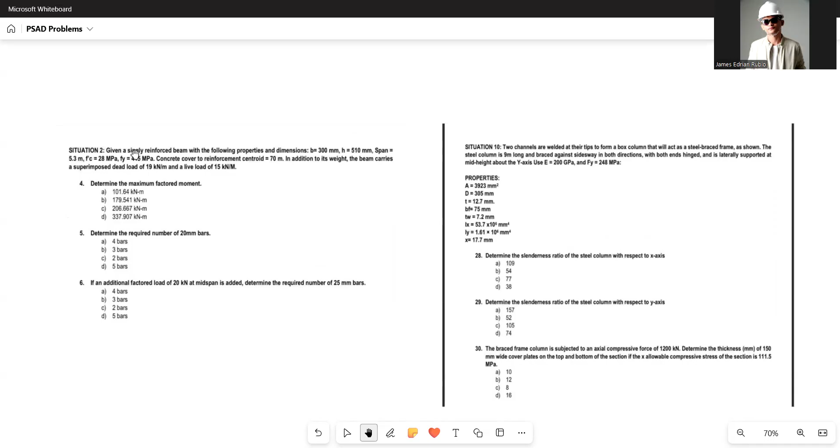Okay, so let's answer these two problems. One involving an RCD problem, the other for steel design.

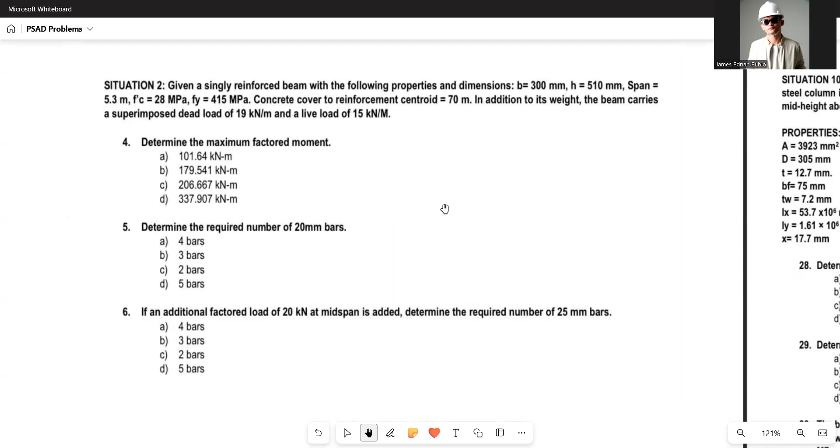So the given problem is stated as follows: given a singly reinforced beam with the following properties and dimensions. Let's draw that.

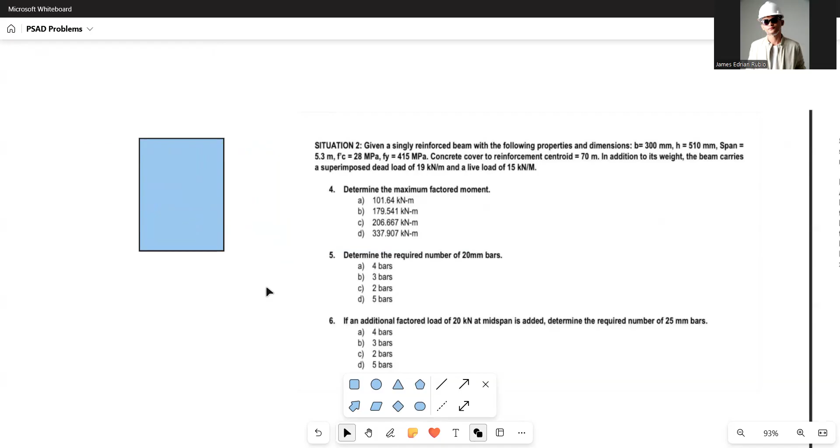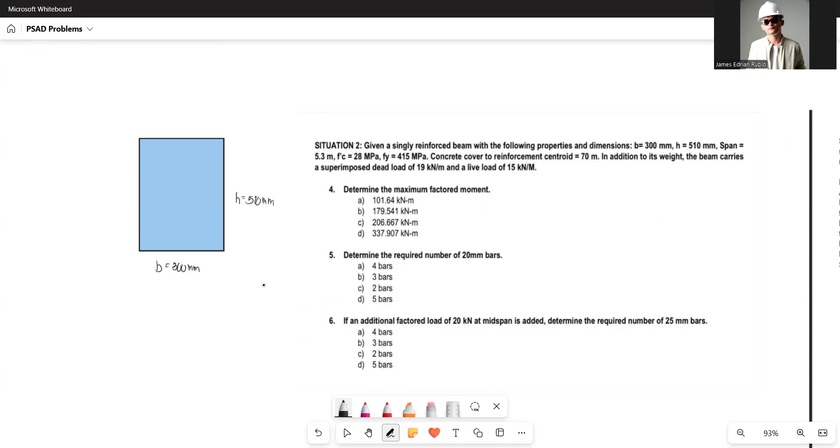So given a beam, a reinforced beam, with the following dimensions. Our base, you have a base of 300 mm, a height, total height of 510 mm, and a span, so basically this is a span.

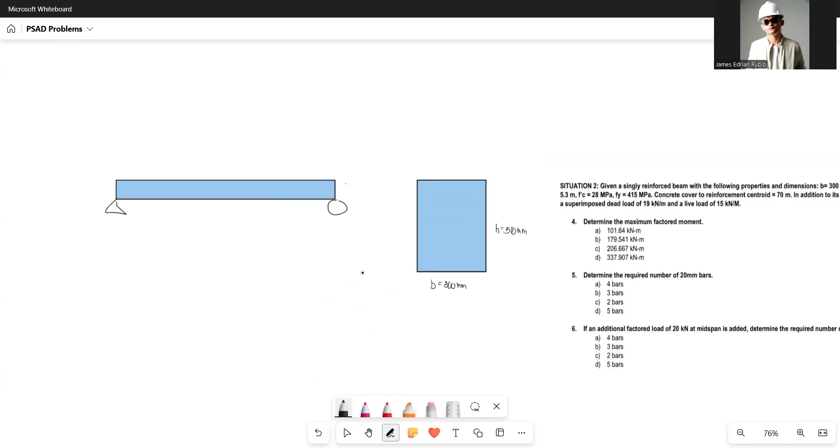So here is... this is just a simple span. It's also stated as a simply supported beam.

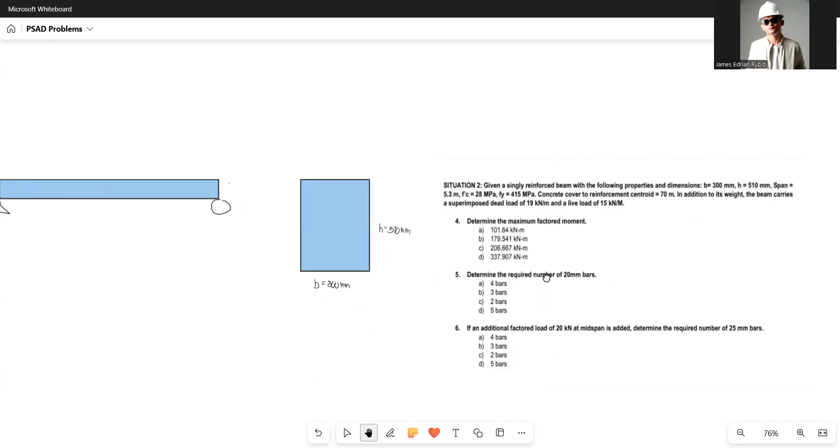So, a singly reinforced beam with the following properties and dimensions: B300, H510, span of 5.3 meters. f prime of c, or the specified compressive strength of concrete, that is 28 megapascals. So Fy is 415 megapascals.

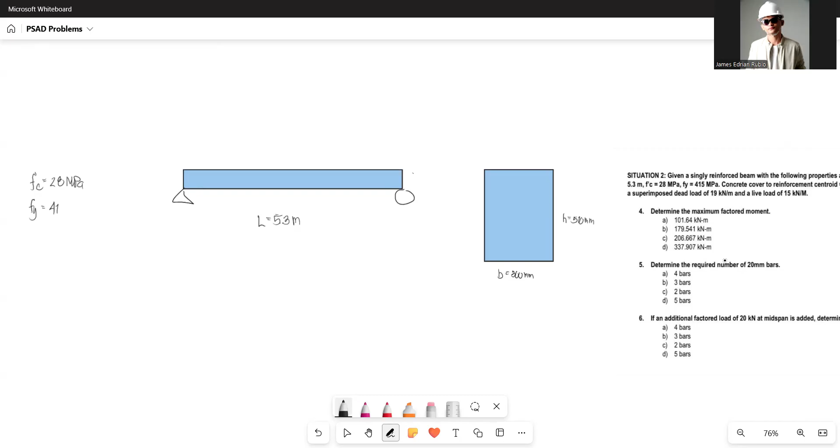Okay, so concrete cover rather, to reinforcement centroid. So this is the tension steel. SRB lang naman yan, so that will be 70.

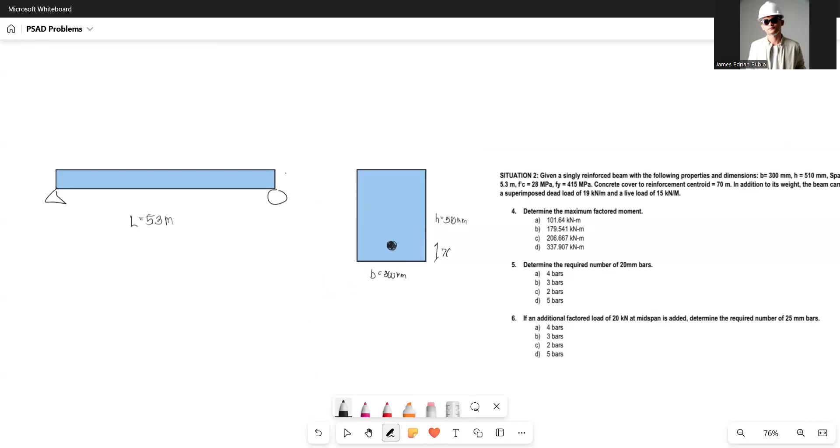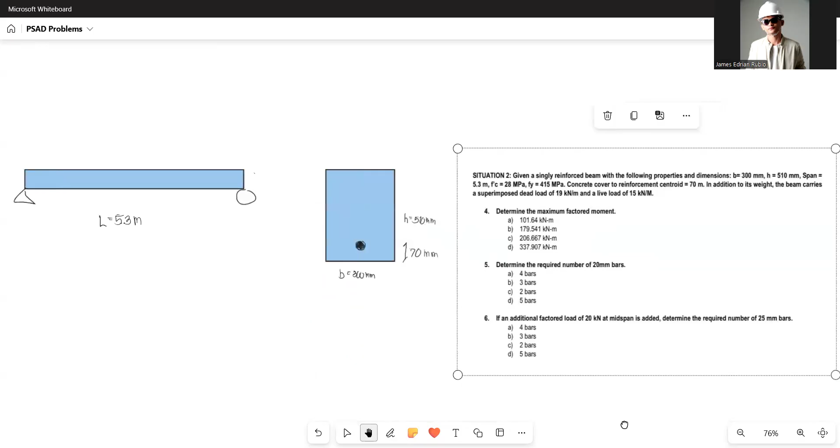So in addition to its weight, the beam carries a superimposed dead load of 19. Okay, so suppose that's our beam. Actually, that's fine, that's the beam as is, then this uniformly distributed load.

For the self-weight, what we'll do is use the unit weight of concrete times base and height, base by height of our beam, or its gross area.

So, for unit weight of concrete, what should we use? Let's use, I'll use 24 kilonewtons per cubic meter. Though 23.5 is also acceptable, 23.544, I think that's what's in the code. Basically somewhere around that: 24, 23.5, 25. Did anyone use 25?

So, here's the base and height. Let's convert to meters: 0.3 by, the height is 0.51. Okay, so we got that set up.

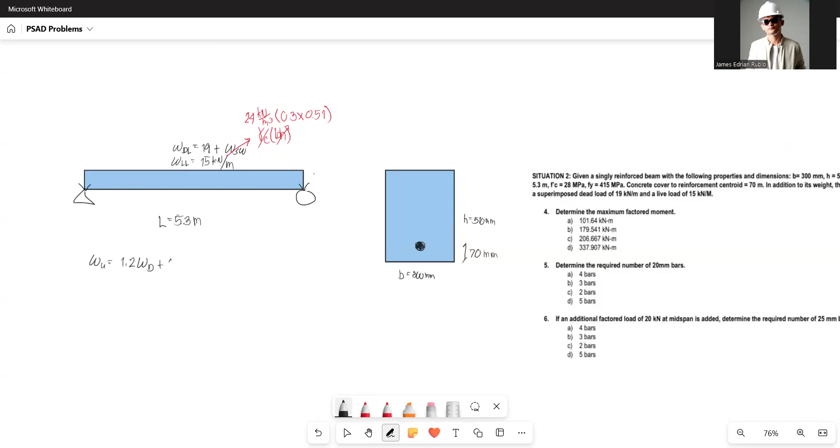Okay, let's set it up. I won't show the full computation, but for the self-weight: 24 times 0.3 times 0.51. I already have the answer: that's 3.672.

So that's 3.672 kilonewtons per meter. Then let's add the 19 times 1.2 plus 1.6 times the 15. So that will be 51.2064 kilonewton per meter. That's our ultimate load.

So given a simple span, we can get the maximum factored moment. That's WL squared over 8, that's the maximum moment. W we already have, length in meters is 5.3. Square that over 8, so that will be 179.798 kilonewton meter. So that's the answer for number 4, 179.

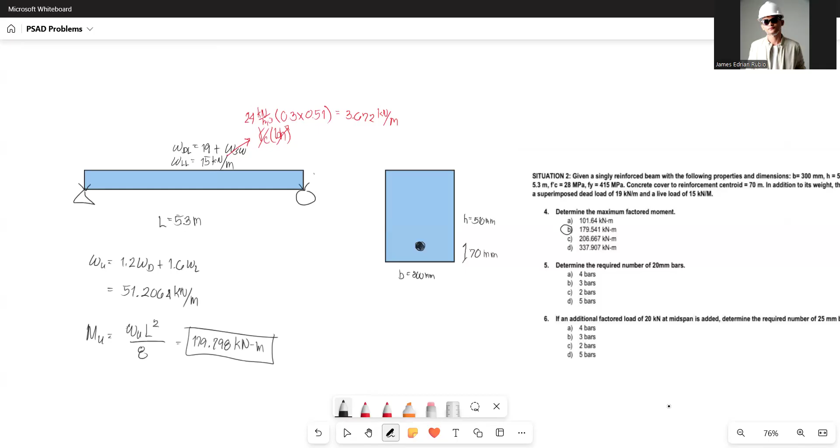So, next: determine the number of 20mm bars. Of course we'll use the MU, which is given in the choices to use. So 179.541 kilonewton meter. That's for number 4.

Number 5, determine the required 20mm bars. Okay, so we already have the MU. That equals phi MN. We'll get phi later. So MN is the nominal moment, which we can derive from here.

We'll have a compression block there, the depth of the compression block. Can we use a straight line? So here it is, this is our compression block, depth of compression block, let's call it A, then this is B. For the compression in concrete, that's 0.85 times F prime C, then multiply by the area, A times B.

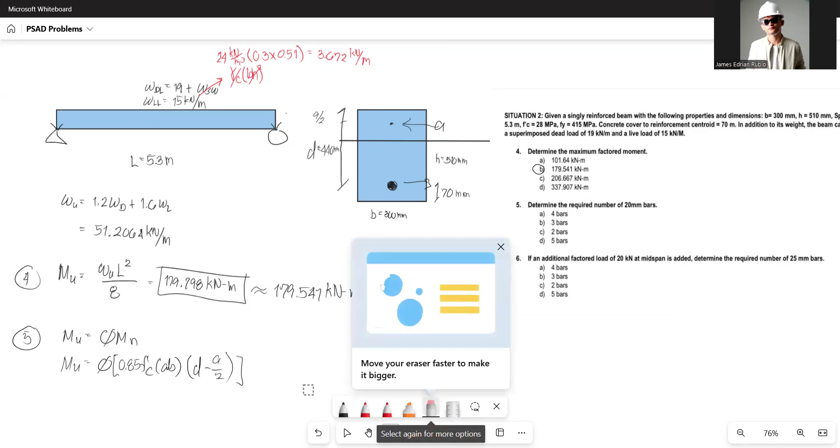Then we get this, okay that's fine. That will have a value in Newton millimeter. This one is in kilonewton meter. So multiply this, since this one is in Newton millimeter, to make it kilonewton meter. So let me write Newton millimeter, to convert to kilonewton meter: 1 Newton... sorry, 1,000 Newton is 1 kilonewton, 1,000 millimeter is 1 meter. So the Newton and millimeter cancel out.

So basically you have to divide it by 1,000. Or it can be made into 1 times 10 to the negative 6. Or divide by 1,000. Ah, 1 million actually, not 1,000. It's 1 million, so that's it.

What we get there is the value of A. Let's get the value A there. So this value, let's use this as 179.541, F prime of C, given A. This is what we'll get, the value of A. The D we already have, so there.

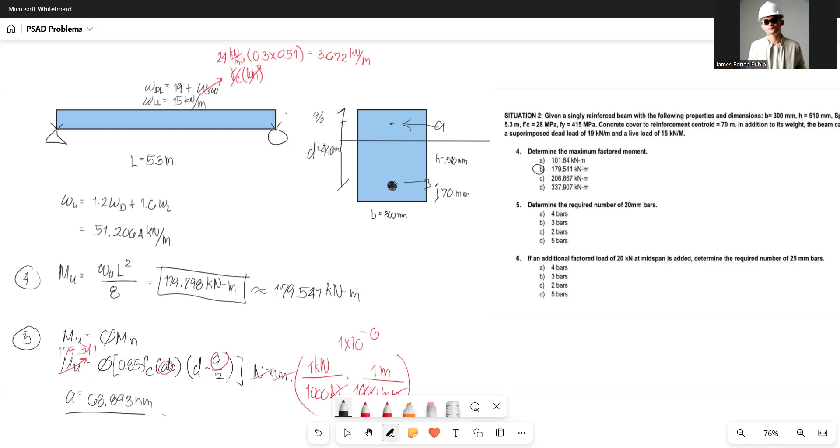To solve for A, the value, that will be 68.893 mm. There we go.

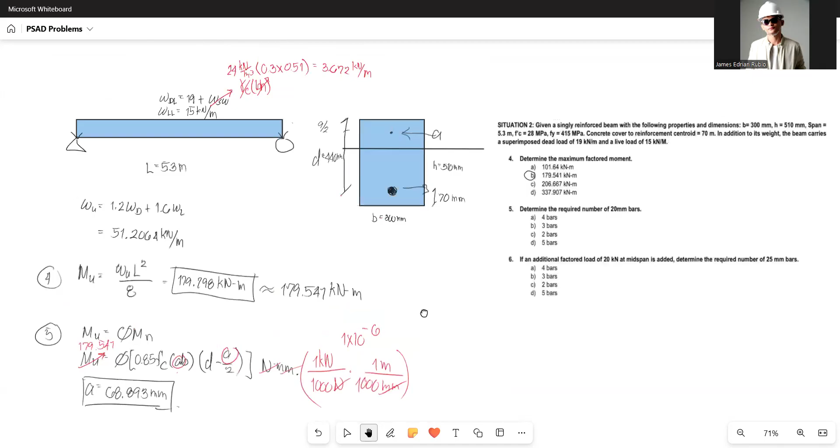Okay, so we've got A. What's next? What we need is the number of bars. So let's equate that. Let's get... okay, let's just derive the formula. We all know that compression equals tension. These are forces: 0.85 F prime of C, times AB, equals AS, FY. So to solve for AS, let's solve for AS: that will be 0.85 F prime of C, AB, over FY. So let's see, just substitute the value of A we got earlier.

That will be 68.893. So our AS is 1185.29 mm squared.

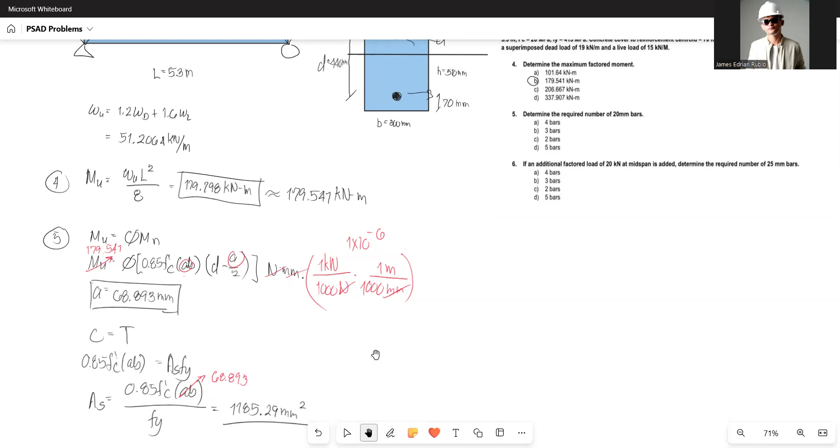Okay, so that's just the area, total steel. What we need is the number of bars. That's 20 mm. Actually, we could put it here, right? Sure, let's equate this. This is the area of the bar: pi over 4, diameter squared, times n. I already know the d, this is 20. So to solve for n, what is it? 3.773 bars. Or let's round up to 4 bars. 4 bars of 20 mm. There, that's your answer. 4 bars it is.

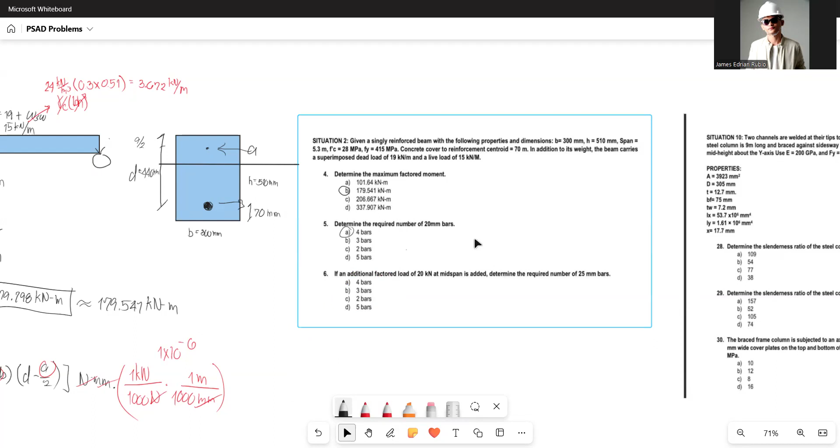Next, if an additional factored load of 20 kilonewton is added at midspan, determine the required number of 25 mm bars. Okay, so this repeats again. Basically you're going to repeat the process, because it says we're adding 20 kilonewton at midspan. So let's put this here too.

So basically this will change. The ultimate moment is omega UL squared over 8 for UDL. Then we add PL over 4. That's PL over 4. What's being asked is the additional factored load, 20 kilonewton at midspan. That's P, a concentrated load. So that becomes the maximum moment at the center. Since they're at the same position of maximum moment, you just add them.

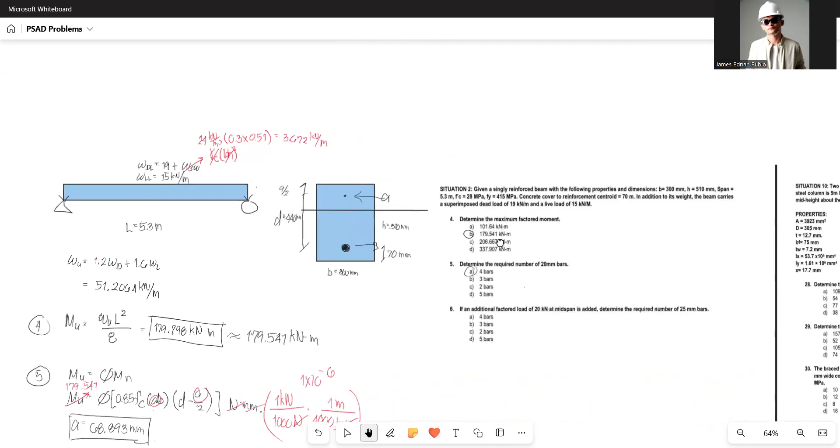So, if an additional factored load of 20 kilonewton at midspan is added, determine the required number of 25 mm bars. Okay, so that's it, these are the same. This is basically the same as before. It will be added with PL over 4. WL squared, we already have that.

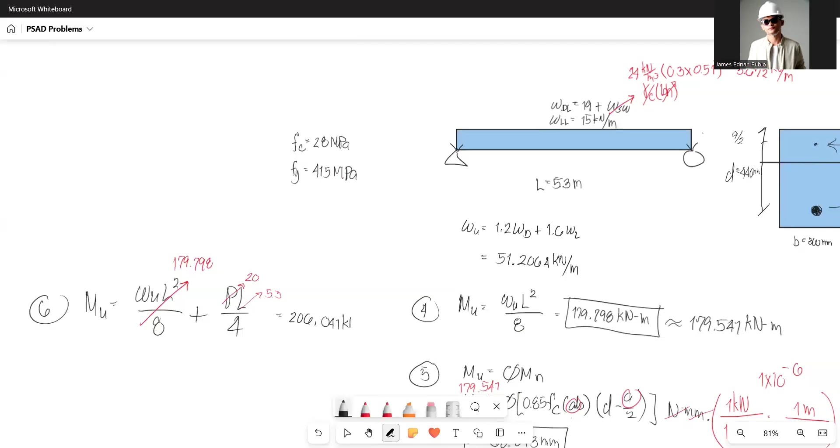179.798. For P, we have this 20 kilonewton, and this one is 5.3. Let's get that value. The new moment is 206.041 kilonewton meter. There. That's the maximum moment for you.

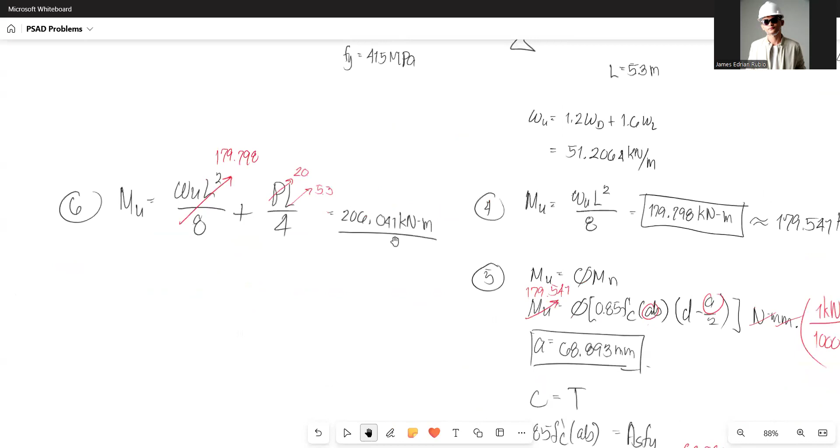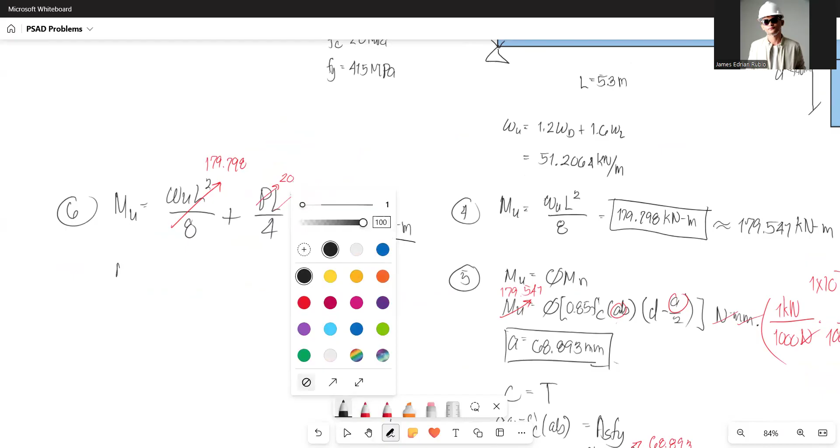Let's get A again. Basically it's just repeated, just added on. Mu. Still, Mu is equal to phi times Mn. So we're still going to use 0.85 F prime of C, AB. Because if we use tension, we don't know AS, and we don't have A either. So there are two unknowns. Let's just use this instead. This is basically already known, just divide by 1 million.

So, we have Mu 206.041. We have this, our unknown. This is the unknown, so solve for that. That will be 80.1768 mm.

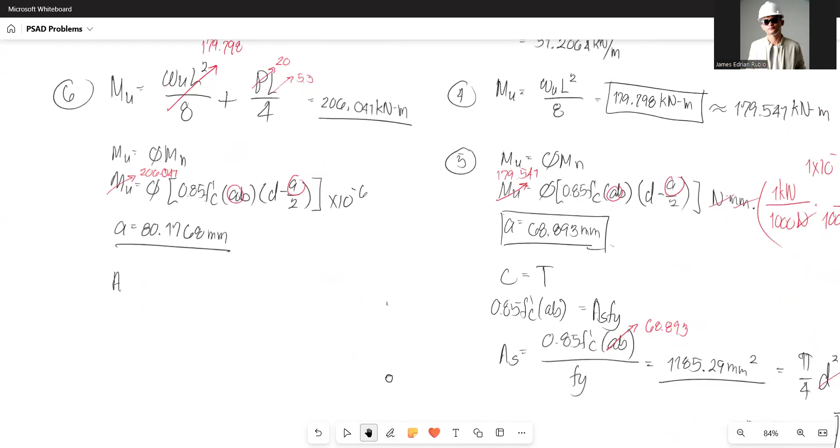Okay, then the area, this is what we're looking for. So the area, what size bars are those? 25 mm bars. The area for 25 mm bars: pi over 4 times diameter squared. This one is 25. And this one, oh, don't we already know this formula? This one is 0.85 F prime of C, AB, over FY. Same as before, which I combined.

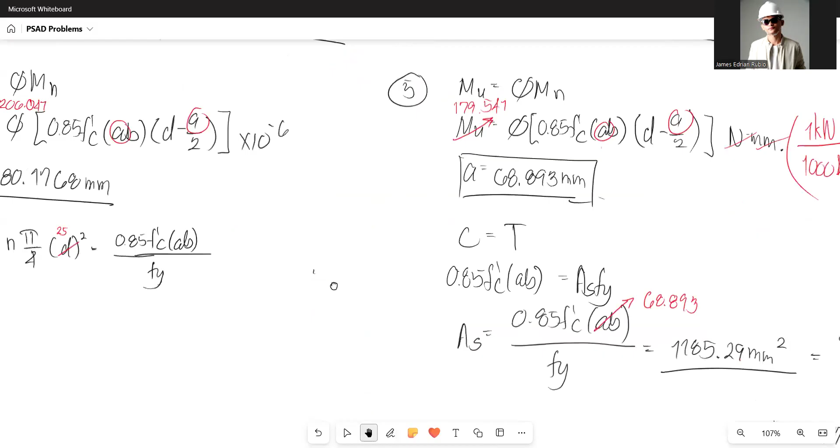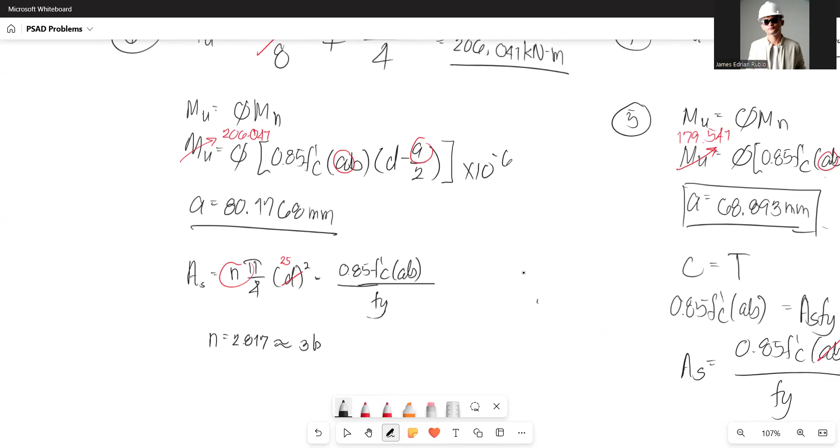So let's solve for N. This is the unknown. We have this, and this. There, so we can solve for N. Number of bars is 2.817. Rounds up to nearly 3 bars. There we go.

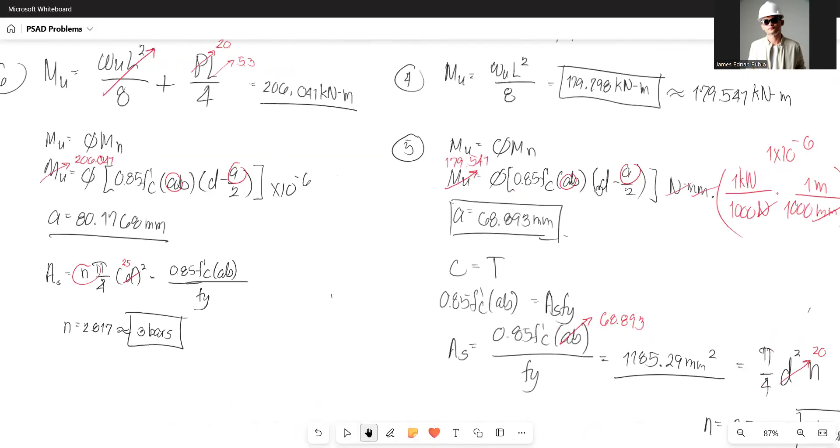That's for the RCD problem. One, two. One... Oh wait, A wasn't actually unknown. A wasn't actually required, so it shouldn't have been boxed.